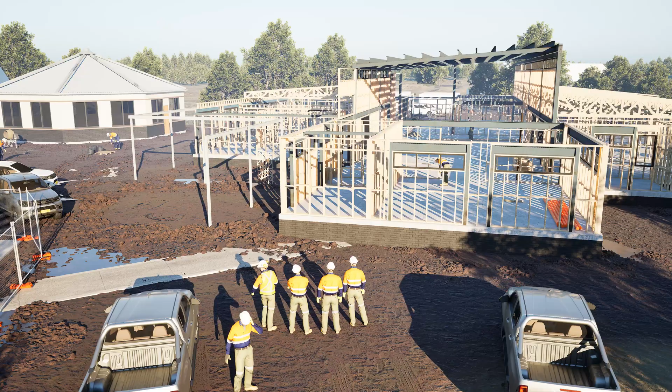In 2020, the construction of a secondary school building was underway. The principal contractor engaged a subcontractor to provide carpentry services at the site. The subcontractor engaged a contract carpenter to provide labour to install roof trusses.

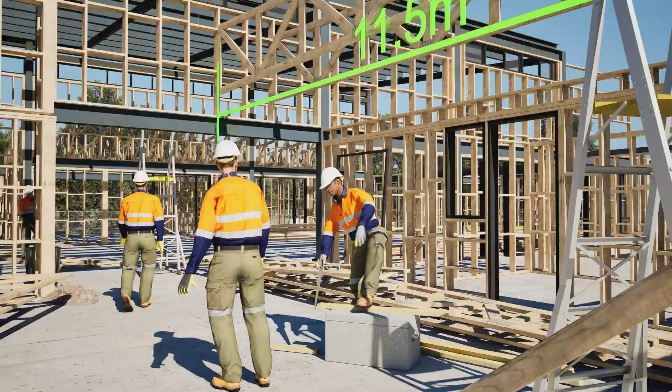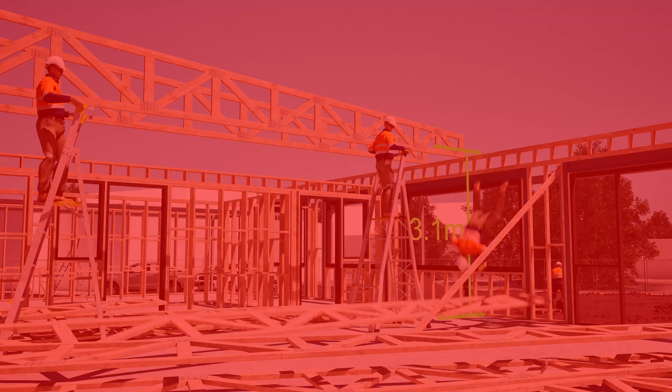On the day of the incident, workers of the contract carpenter were installing single-span flat roof trusses on erected wall frames. A worker stood on the top plate. A truss was passed up to him by other workers. As he was placing the end of the truss into position, the truss became unstable and the worker fell to the concrete floor slab. The worker suffered serious head injuries.

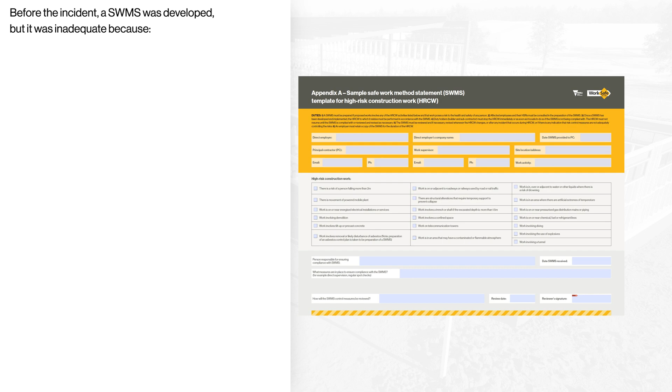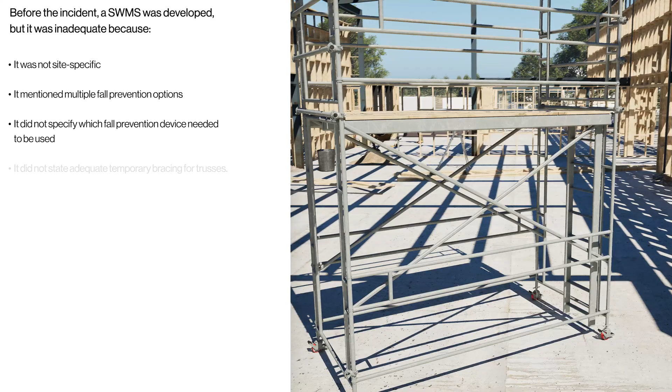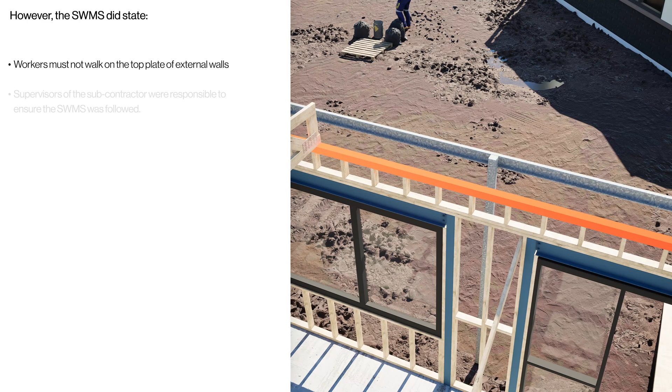Before the incident, a Safe Work Method Statement, SWMS, was developed, but it was inadequate because it was not site-specific. It mentioned multiple fall prevention options. It did not specify which fall prevention device needed to be used, and it did not state adequate temporary bracing for trusses. However, the SWMS did state workers must not walk on the top plate of external walls, and supervisors of the subcontractor were responsible to ensure the SWMS was followed.

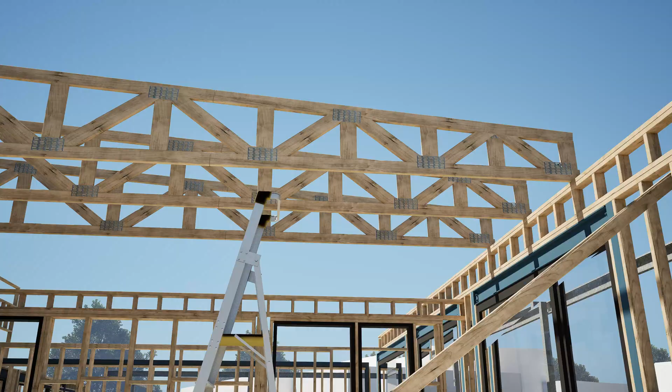On the day of the incident, supervisors of the subcontractor were not present on site. Single noggins were used to temporarily brace the trusses instead of chord ties. Chord ties were part of the manufacturer's instructions and ensure the roof trusses are stable prior to attaching permanent bracing. The truss became unstable due to nailed noggins being used as temporary bracing instead of chord ties.

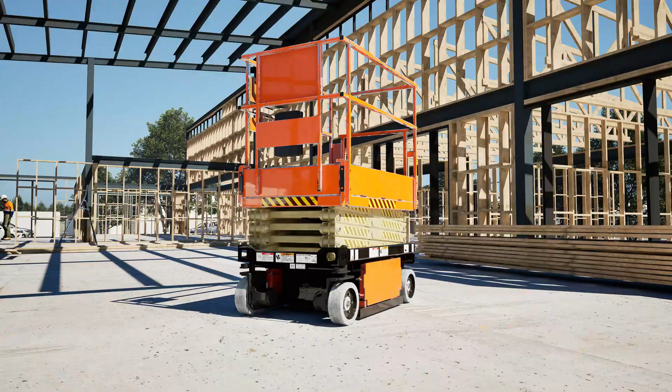Prior to the truss installation works, an EWP and a mobile scaffold were available on site for use, but were not used. The steps of the job had changed beyond the original plan due to fall prevention devices not being used. At no point did work stop and the SWMS get reviewed and revised.

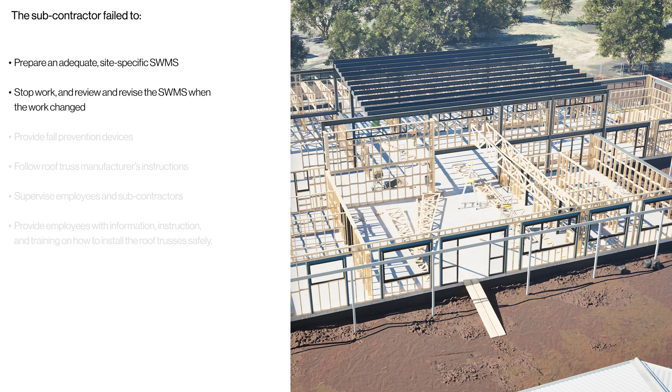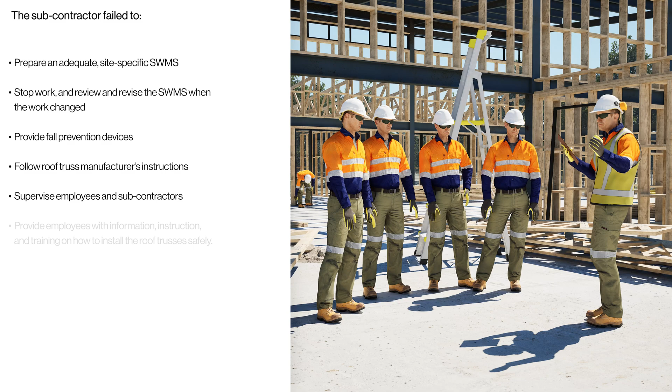An investigation into the incident identified the subcontractor failed to prepare an adequate site-specific SWMS, stop work and review and revise the SWMS when the work changed, provide fall prevention devices, follow roof truss manufacturer's instructions, supervise employees and subcontractors, and provide employees with information, instruction and training on how to install the roof trusses safely.

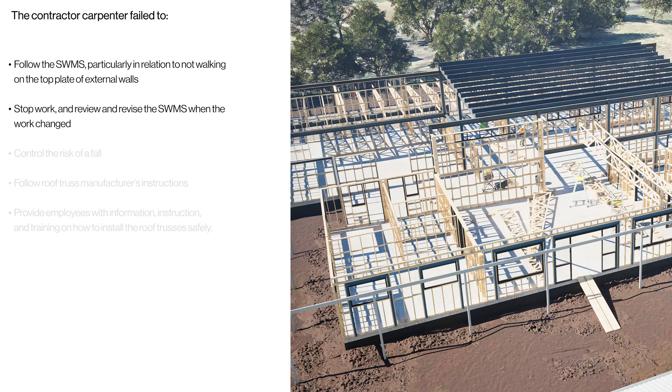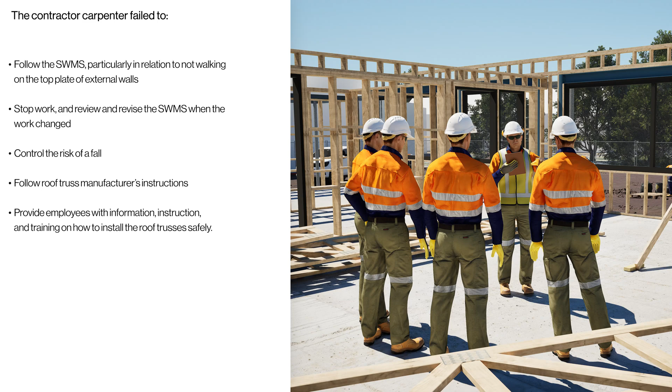The contractor carpenter failed to follow the SWMS, particularly in relation to not walking on the top plate of external walls, stop work and review and revise the SWMS when the work changed, control the risk of a fall, follow roof truss manufacturer's instructions and provide employees with information, instruction and training on how to install the roof trusses safely.

The erection of roof trusses is high-risk construction work, as someone can fall more than 2 metres. When working at height, apply risk controls using the falls hierarchy of control. First, consider alternative designs for large spans and/or high trusses to facilitate safer installation. Next, consider using passive fall prevention devices like a trestle scaffold system, a scaffold on the exterior wall, a mobile scaffold, or an EWP.

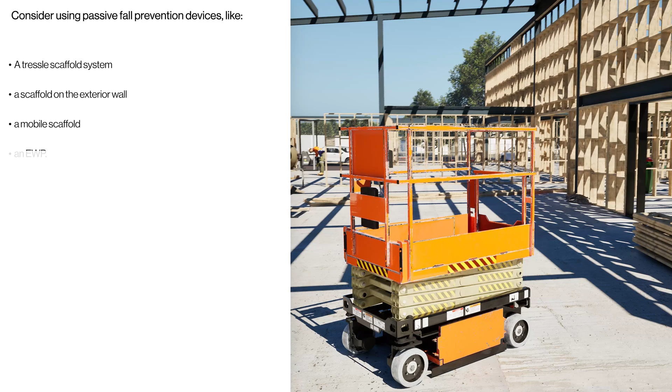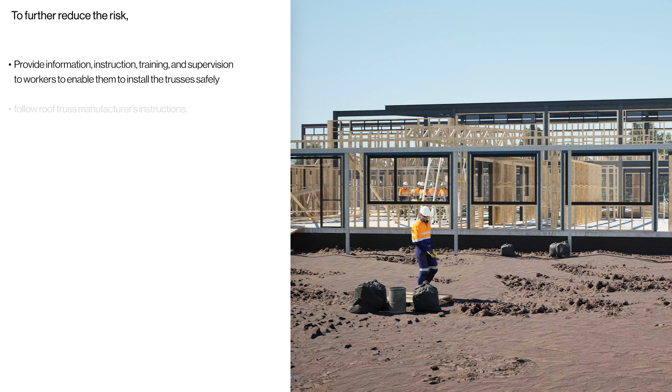To further reduce the risk, provide information, instruction, training and supervision to workers to enable them to install the trusses safely, and follow roof truss manufacturer's instructions. Do not stand on or work from the external top plate.

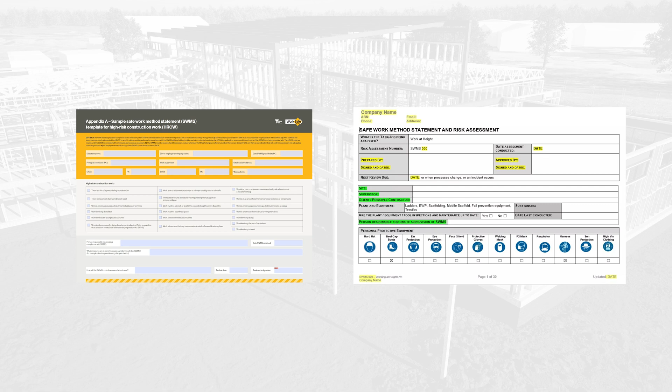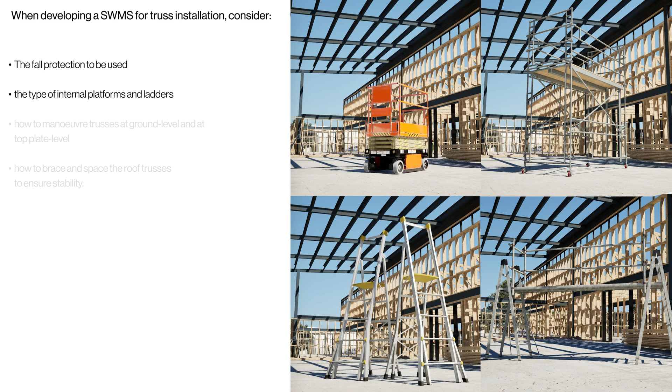SWMS are required for high-risk construction work. When developing a SWMS for truss installation, consider the fall protection to be used, the type of internal platforms and ladders, how to manoeuvre trusses at ground level and at top plate level, how to brace and space the roof trusses to ensure stability. SWMS need to be site-specific and must be reviewed and, if necessary, revised whenever the high-risk construction work changes or there's an indication the risk controls are not working.

Falls are one of the leading causes of deaths and injuries in construction. The highest level of risk control should always be implemented. This video was produced as a result of an enforceable undertaking between Tailoring Constructions Proprietary Limited and WorkSafe Victoria to raise awareness of occupational health and safety.